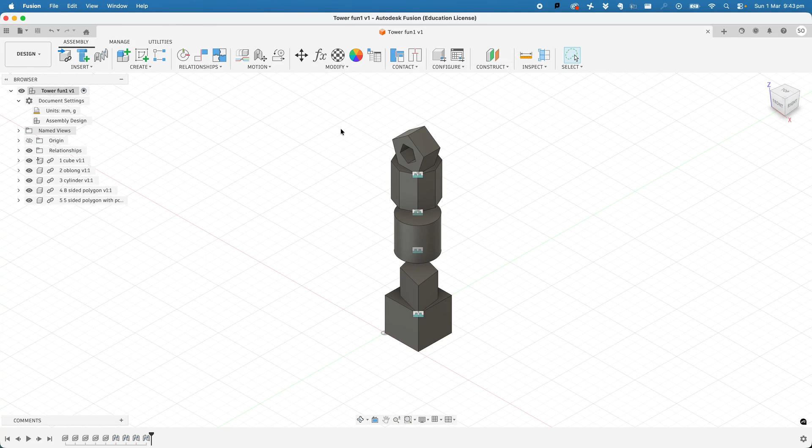Hello, this is Mr. O, and I'm going to show you how to use the joint command in Fusion 360. I've created a number of random shapes, and I'm going to build a fun little random-shaped tower by joining these pieces together.

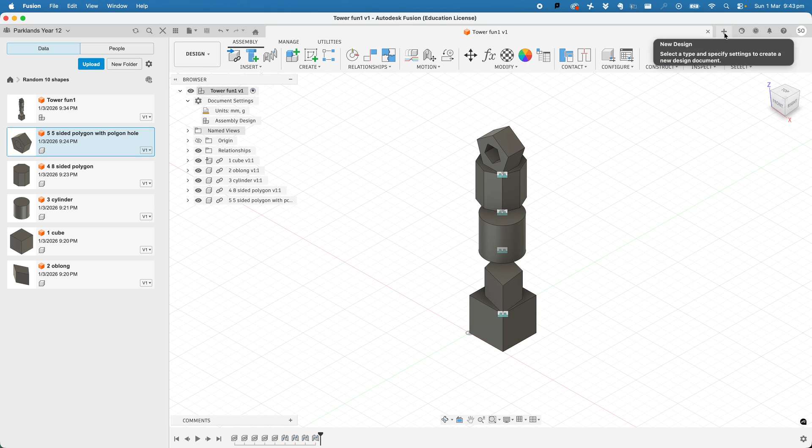The first thing I'll do is open up an assembly design. Make sure it's all in millimeters, and push create new.

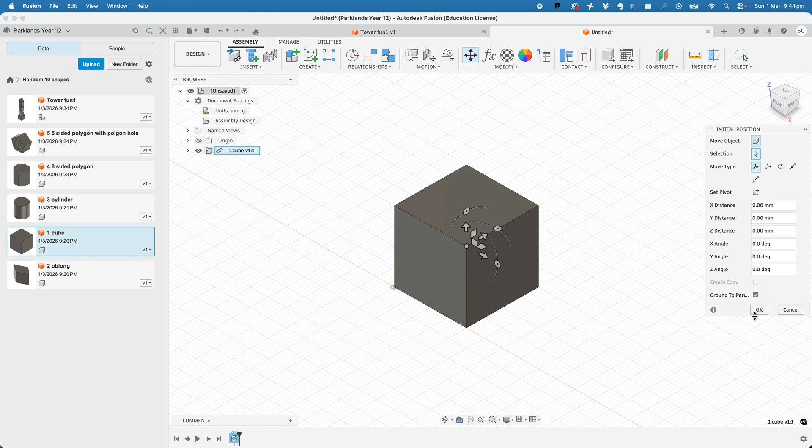I've already created 5 different random shapes, so I move my cursor over this one, 2-finger click or right click, and go insert into current design. I want my cube to be the grounded figure, the cornerstone of my tower, so I'll leave him there and push OK. This is where it's placed my cube.

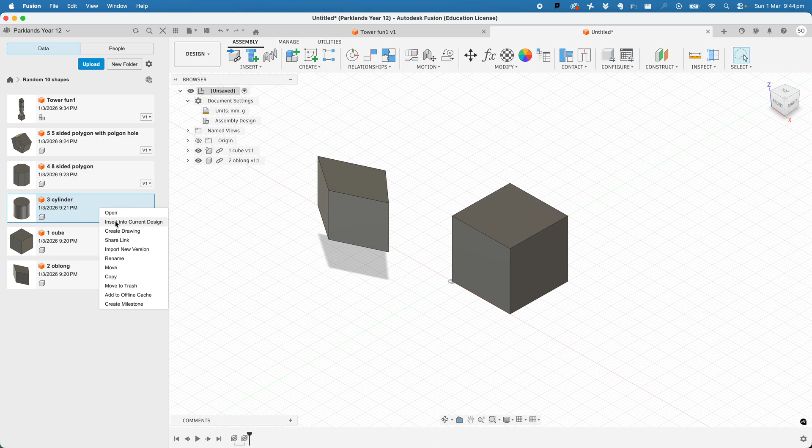I'll do the same for my oblong strange shape, insert it into the current design. It inserts where I drew it, so I grab the center piece and drag him out of the way so he sits over there, then push OK again. I'll grab this guy too - I've got to grab all my pieces that I've created individual parts for, that I want to build my tower out of, and just put them onto my page.

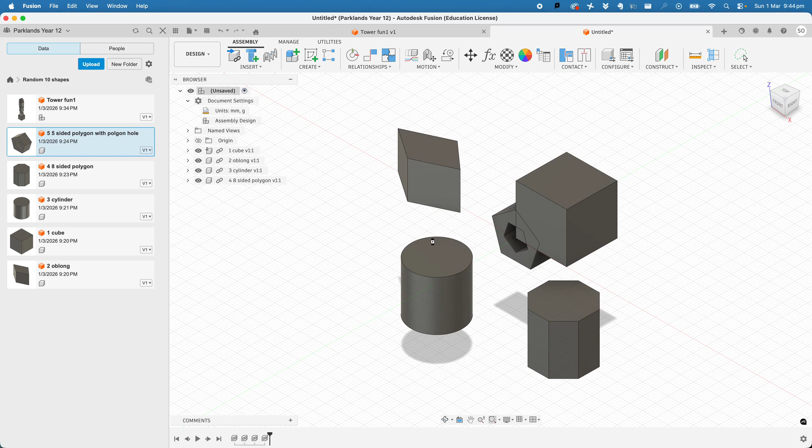I'm going to try and do all of them together. Insert into design - I've got this weird 8-sided polygon that I created. And my last one was an interesting 5-sided polygon with a hole in the middle as well. So now I have my 5 different shapes.

Now you'll notice if I go over the cube and highlight it and 2-finger click or right click, it says ungrounded from parent - this is actually my grounded part, so all my other pieces will ground to that part.

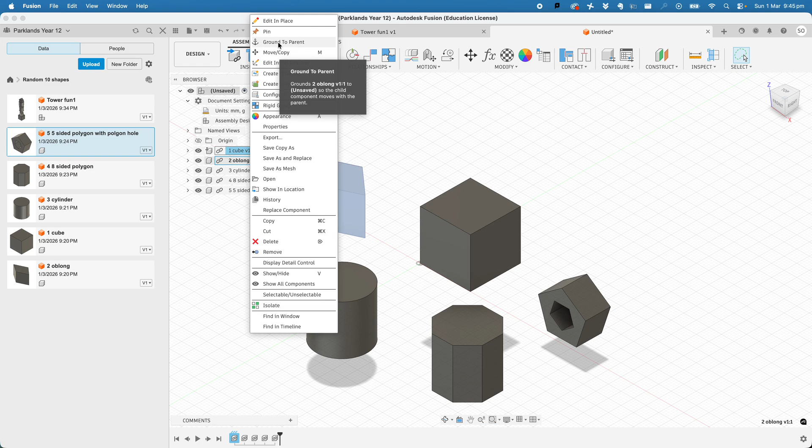I'll push escape, top left corner. And if I right click on that one, it says ground to parent. I'm just making sure I escape - they're all ungrounded, that's why it's asking if I'd like to ground it to a parent. I'm not going to do that right now. I know this guy's grounded to this plane on my page.

So what I do now is go up to relationships, and go down to joint, and click the J. I can just push J on my keyboard as a shortcut, and I push joint.

What's going to happen now is I'd like to join this guy to this guy, but I want that corner to land exactly joined with that corner. So the first guy I want to join to my grounded parent - I want him to go there.

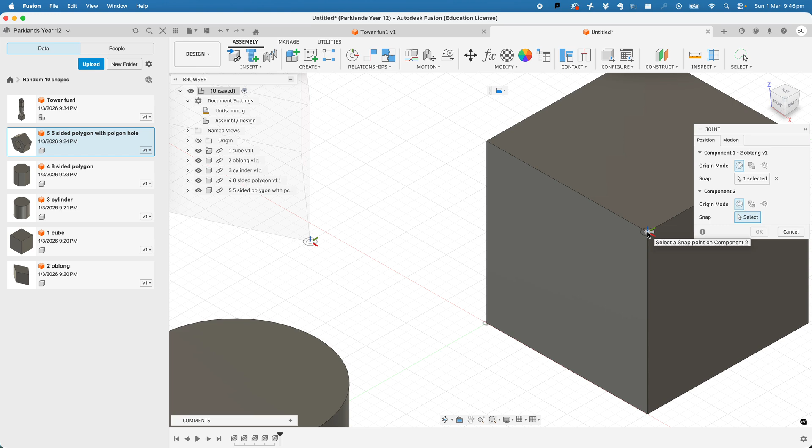Notice when I move my cursor over an edge, there's a little axis that forms - blue up being my z-axis, green away from me my y-axis, and red being my x-axis. I want to match that to the axis I'm going to push. I click onto the item I want to drag to - blue up, green away, red towards. I go over here and adjust it until I have the same - blue up, green away, red there - and I have now joined this piece to this piece.

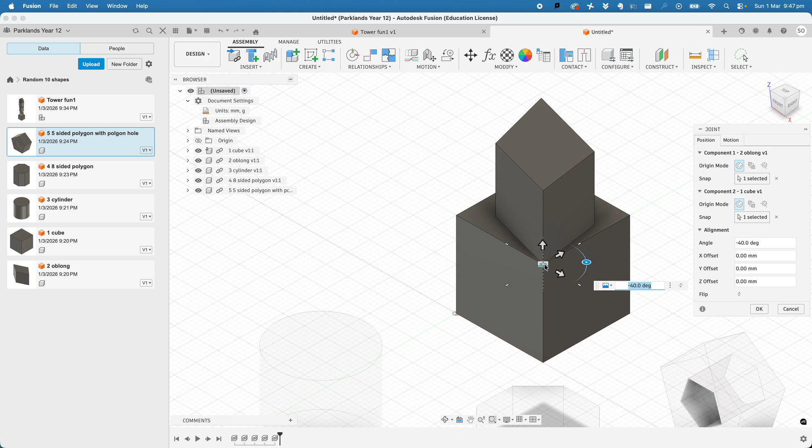I can adjust my angle if I want and pivot him around, but he's joined like the little Lego block you see there to my first piece. I'll move him to there and push OK, and the Lego piece remains. If I want that Lego piece to go away, I'd probably click... no, that's to take him away. I'll show you later how to do that.

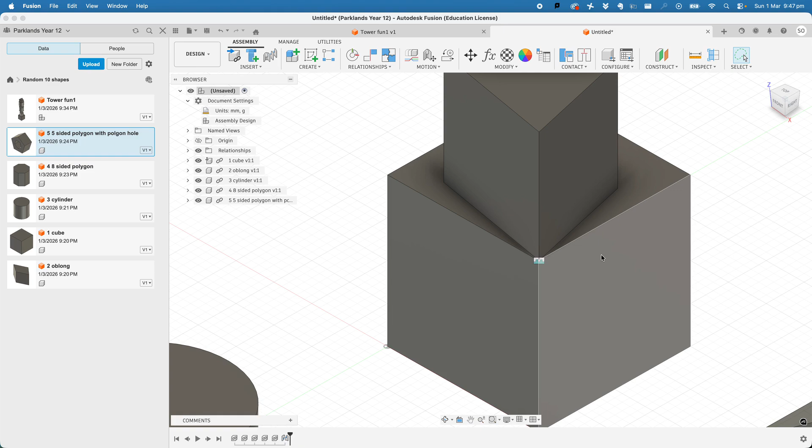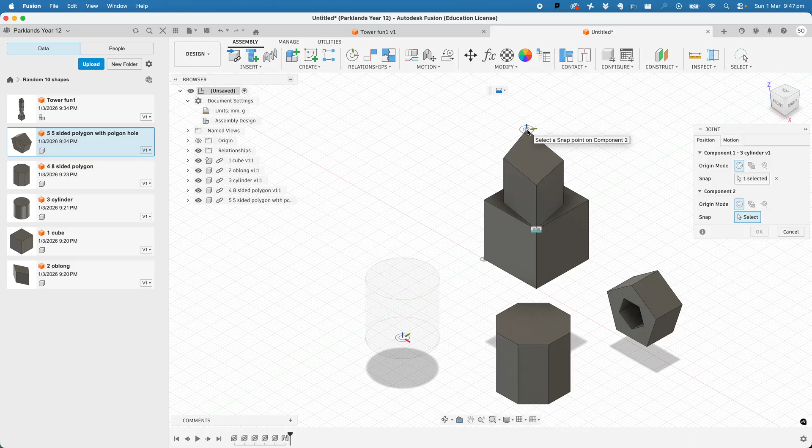Let me grab the cylinder and join him maybe to the center or top of this guy, or to that top over there. I'll go to relationships, joint. I want to join the bottom part, same pattern, to there - so the bottom part of my cylinder is now connected to the other end, as you can see, to my second item. My tower is taking shape, and I go OK.

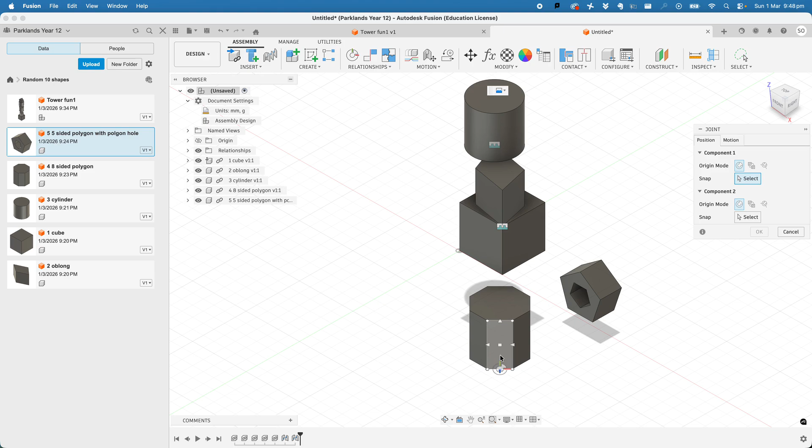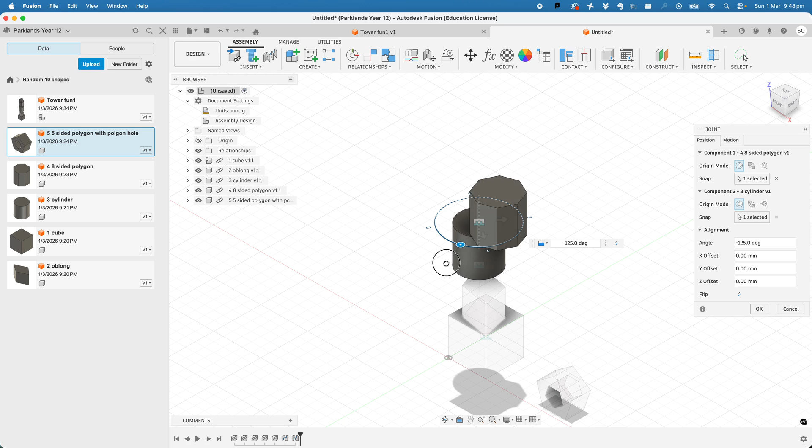Let me take this 8-sided polygon, go relationship, joint. I'm going to take possibly - let me zoom in a bit - this edge over here, and connect him to the center in that same shape. And there he goes. If I don't like him sitting there, looking a bit precarious, I might balance him this way - there we go.

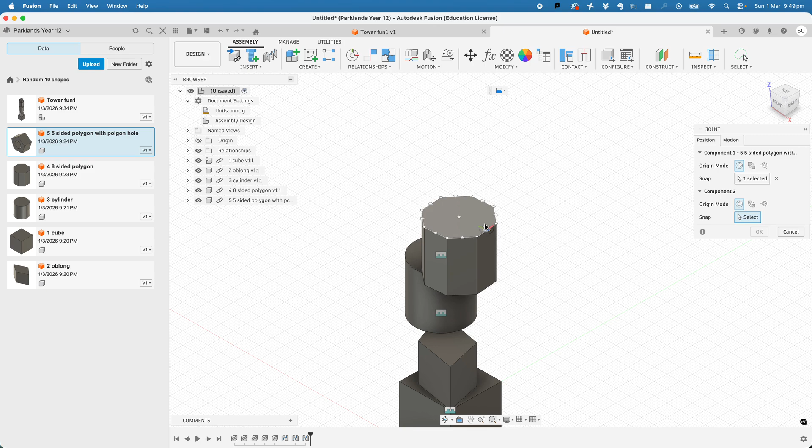And then the final one, in a bit of joint fun, is taking this guy from this corner - and where am I going to place him? You can move him around and adjust where you'd like him to sit. I'm going to say there, up on the edge, and adjust him to move over there.

So there we have a silly tower, which you've just built with all these 5 pieces. You would do this in other exercises when you want to join different parts together.

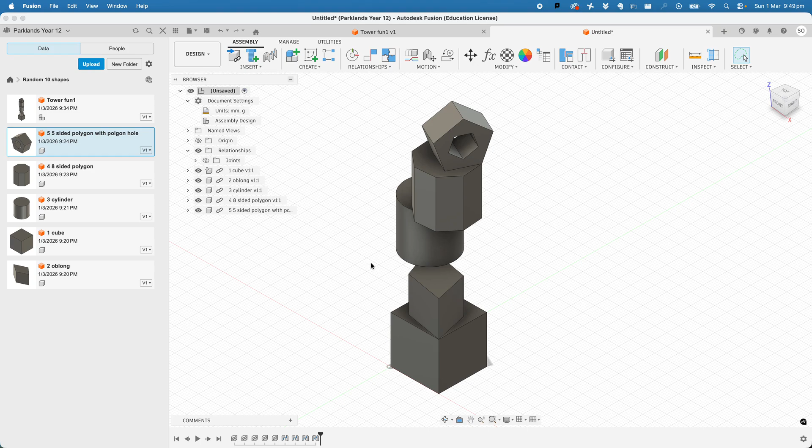You can see all of my joints - this is my grounded parent, and I have 1, 2, 3, 4 other parts connected up there. Technically, in my relationships, if I want to remove all those connections, that's where I would do it. So I can see this view a lot better - and there's my crazy tower, all joined at certain points that I have chosen.

I hope you had a bit of fun, and I hope that helps you in your Fusion 360 journey.